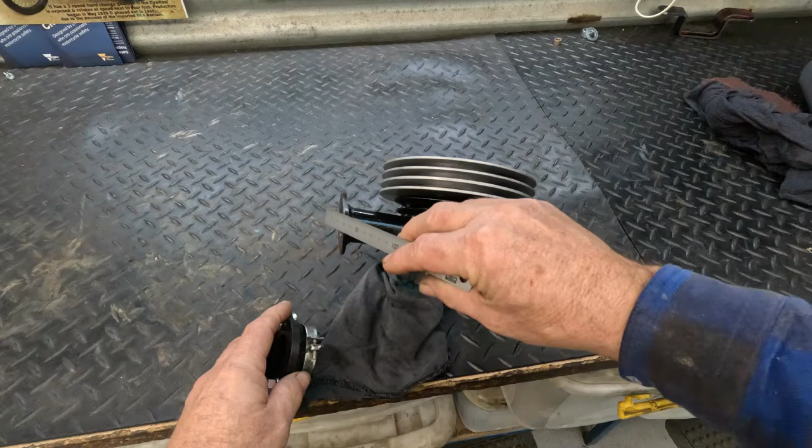You can see on the inlet manifold that this is flange mounted. What I'm going to do is change it to that fitting that fits on the carb, where you've got both sides. So I've got to make a little stub I'll weld on further down, because this flange side is too big to fit up in under here, and that's how much I've got to take off.

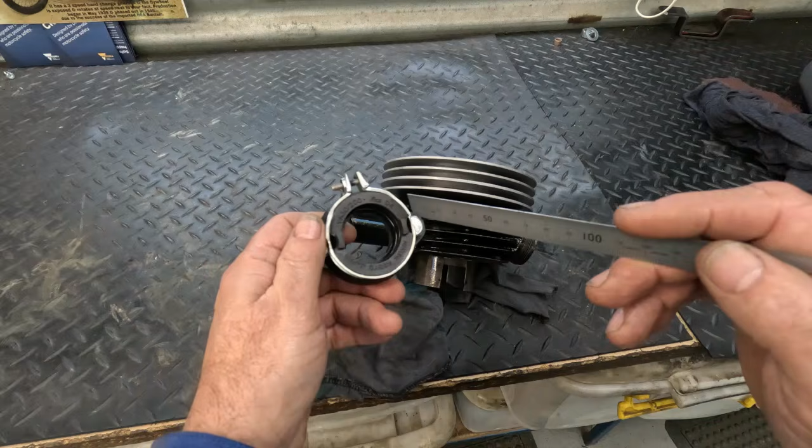First job is to go and machine up the new male stub that will fit in one of these mounts. Imagine one of these mounts without the flange, just back to back like that - that's what I've got coming. So I'll show you the drawing I've done to machine this bit up.

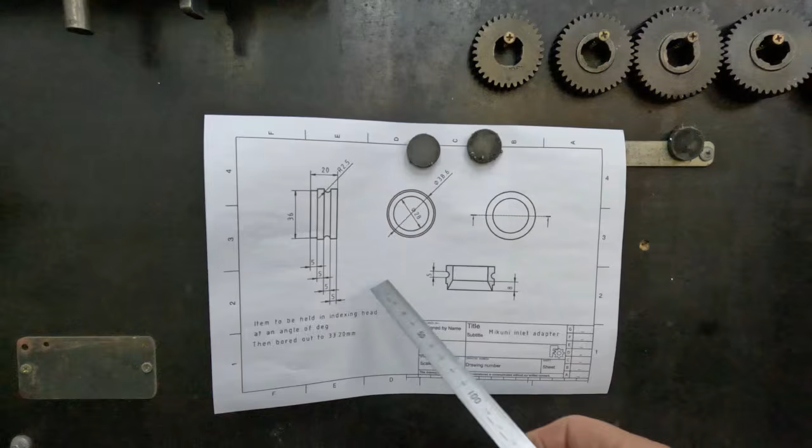So that's my drawing with all my dimensions, and this side will be welded onto the inlet stub on the actual barrel. So I'm changing from the flange mount to this stub mount.

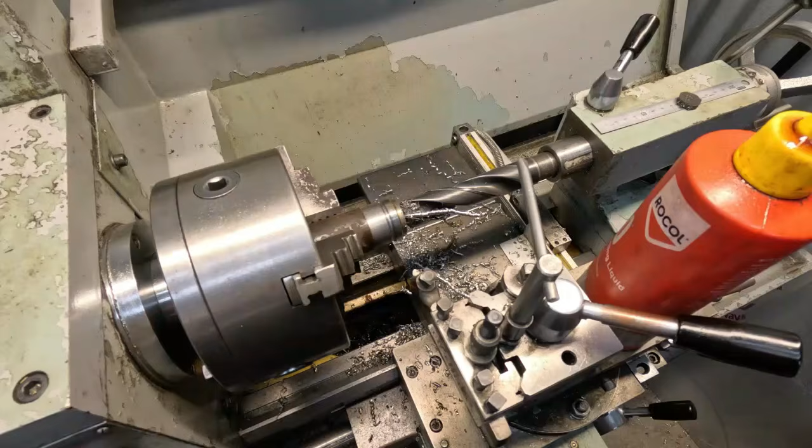I've got the outside diameter turned. I'm just going in, I've done a pilot drill, going in with a 25mm drill, and then I'll bore out to 28mm and part it off.

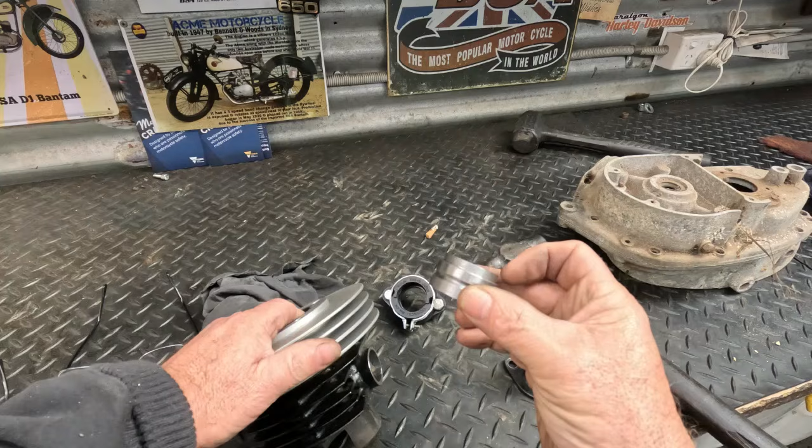So I've made my inlet section, and there it is. As you can see here, I've also cut the inlet tract off - that's how far I was out by calculation. That's a lot.

Next issue is I've got to attach that onto there, and I haven't got an awful lot of room to weld in here. So my current thinking is I will TIG weld it most of the way around and finish off with a bit of bronze.

I can't change this stub out because it'll take too much heat and potentially distort the barrel, which is not what I want because it's already bored and honed. If I was making a new one, I'd make a completely new stub and bronze that on, but I've got to do a retrofit. So I'll keep nutting this one out and see how we go.

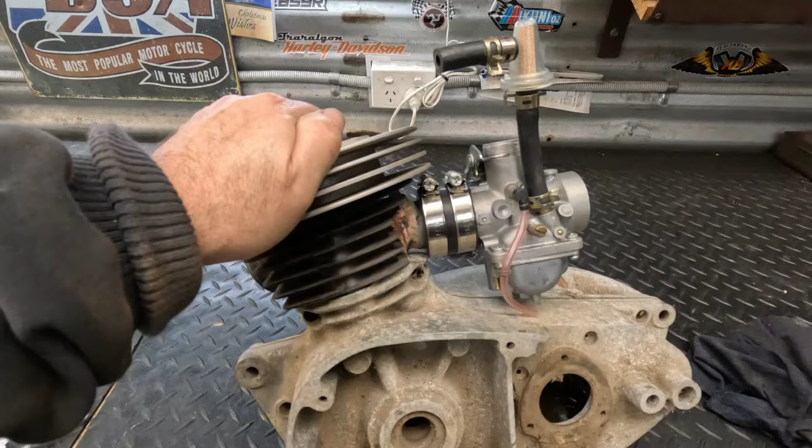So the inlet tract mods have been completed. The adapter that I made yesterday, I've just bronzed that on. Got clearance underneath the carby there. When the engine's sitting in its normal position, that carby's not too angled up - it's got a tolerance of about 7 degrees out of alignment it can cope with before you have to start playing with float levels. So yeah, pretty happy with that.

So we'll have to do a repaint on the fins, and what else have I got to do on the engine? I'm not quite sure, but I think this can go back together - the engine can go back together. So that may be next.

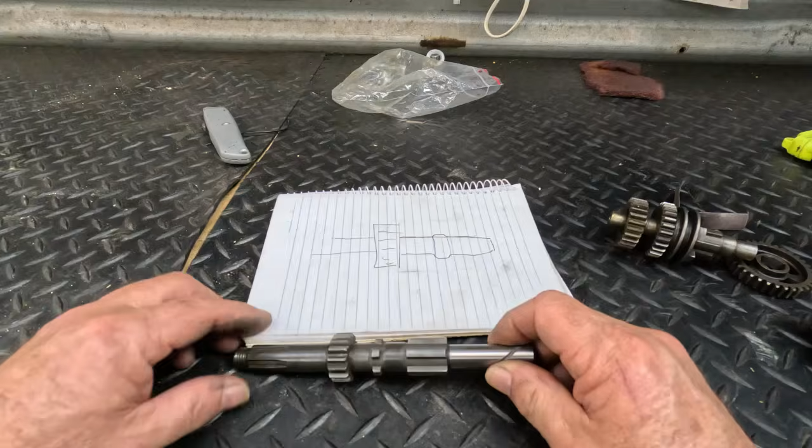So I just bumped the camera. Anyway, this is the main shaft, and I'm about to make up some bushes for the gear. This has got two separate bushes in here, drilled holes through for lubrication, goes on your main shaft. See, this one's really loose, and there's a fairly good reason for that.

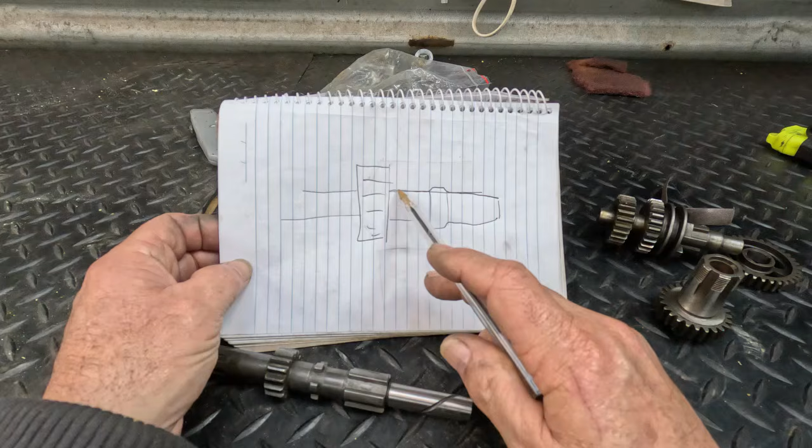If you've just done this quick drawing, when you find these Bantam main shafts, you will find that they are worn on this side, where the gap between the two bushes is it's not worn, and then it'll wear, and then it'll taper off right at the end.

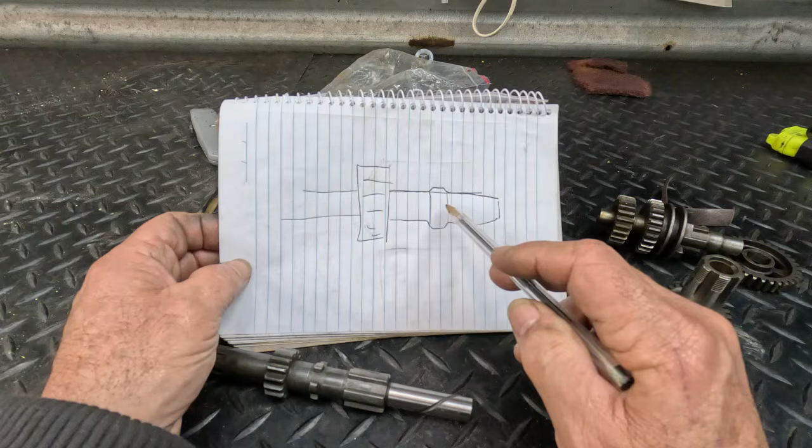So if you're ever going to change out your bushes, you really need to ensure that this is parallel all the way through. Otherwise, there's no point in reaming it, because you've got to get over this hump here, and it's usually a thou or two, and yes, that is enough. You'll find on bad ones the ends wear down by anything up to 10 thou or more.

I've had a friend who's got a cylindrical grinder, and I sent him off a heap of main shafts to just do a minimum grind to clean them up and get them all parallel again, and he's done a fantastic job. Thank you very much, Peter, because I know he watches.

Now this has to get reduced a fair bit, so I'm going to have to make some bespoke bushes, but it means I've got a nice parallel main shaft to work with. So I'll get over on the lathe, get some bronze, make up some bushes, press them in, and we'll get this done.

So I've just turned the outside diameter of these bushes, and I'm just drilling out the inside now.

Obviously that's just a pilot hole. Because we're getting a bit of depth, we just keep backing it out. So there's our bushes, our new bushes pushed in.

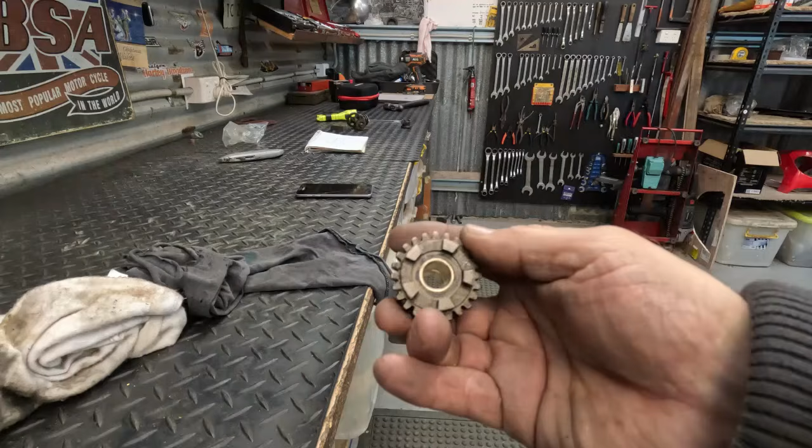And what I'm going to do now is just drill the oil holes in it. You can see an oil hole there, 90 degrees around, and there's another one, a tiny little 16th oil hole. We'll get those drilled in, and then we can go for reaming. Always drill your holes before you ream.

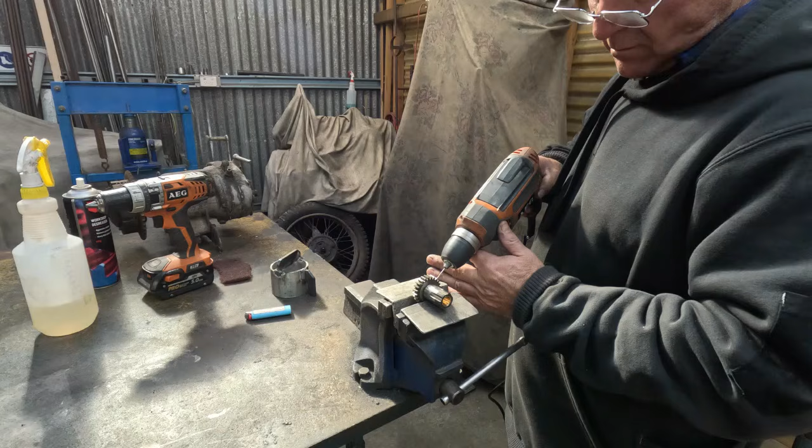Just go through again. The only problem with these tiny drill bits is that they can barely clamp up in the chuck, and the last thing I want to be doing is using a cordless, because they just simply don't spin fast enough. So that's our first hole done, and there's our second hole there.

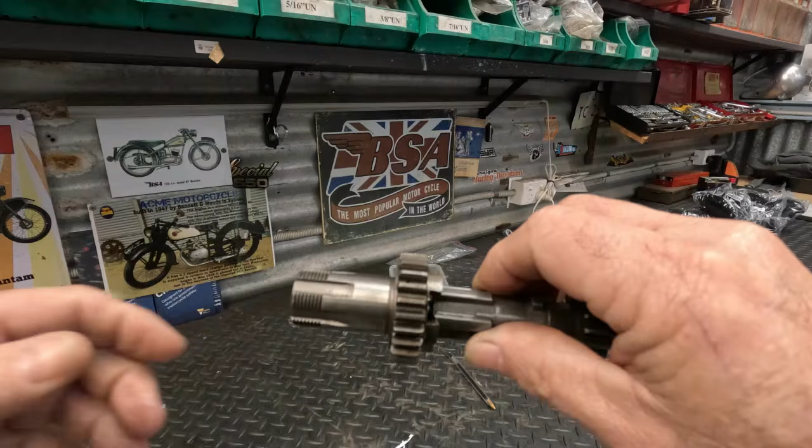So that's our main shaft done. That's got no rock in it whatsoever, and it obviously spins freely. And that's what you want.

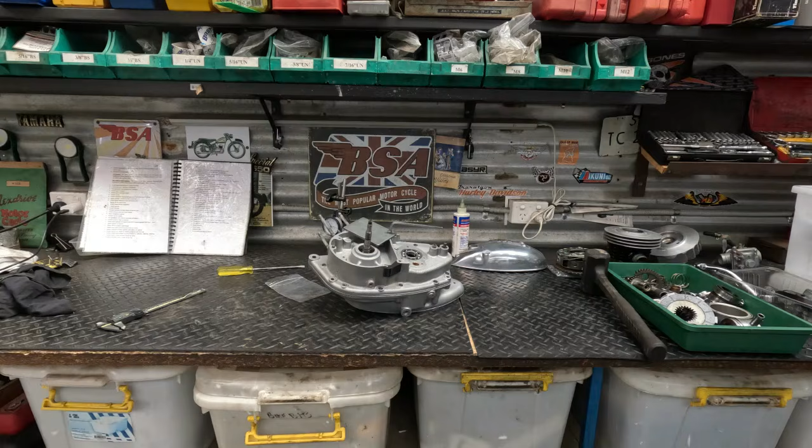So we move on to the next job. We've got everything prepped. And what I'm doing now, I'm just starting my rebuild of the engine. So I'll get all this together and get it back in the box.

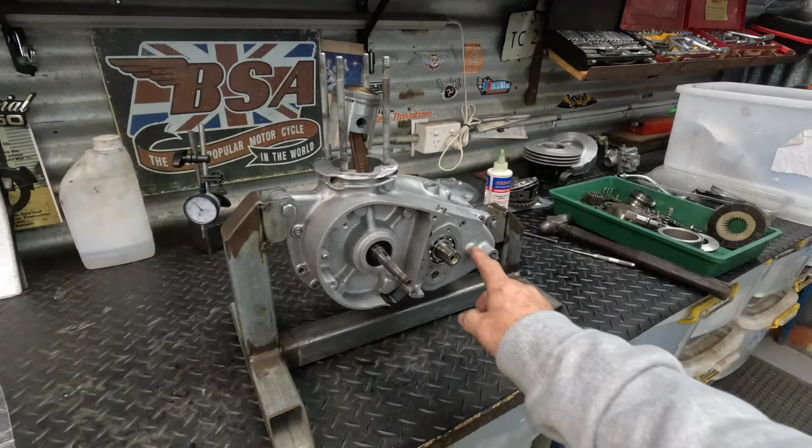Things are progressing well. I did have an issue, however, with this lay shaft bush. It was a fraction tight, end play wise like that. So I just scraped the shoulder surface on the inside, and that's spinning nicely now. I actually measure the end float, so I'll just tap that in, measure it, tap it back the other way, measure it. So I've got four thou, 0.1 of a mil end float in the shaft.

So all the cases are obviously back together and torqued up, and now we're getting ready to put barrel and head on.

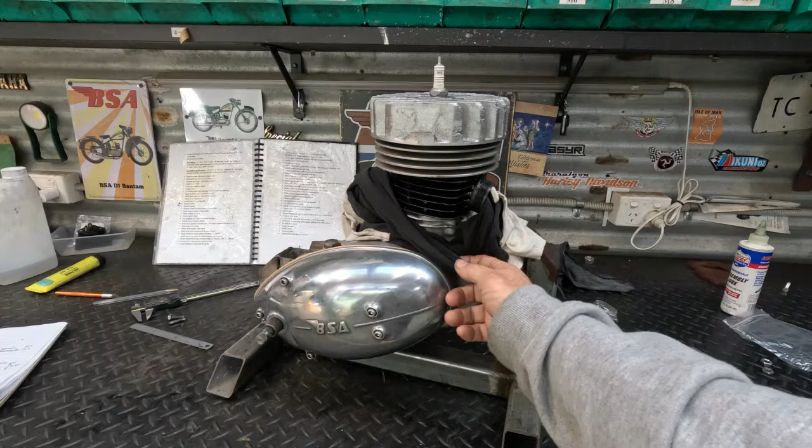It's getting there slowly. I've just got the inlet and the exhaust plugged up with a rag, just pop that in there. What have I got to do now? Put some oil in it. That's it. So we'll get that done, and then we'll be nearly ready to fit up.

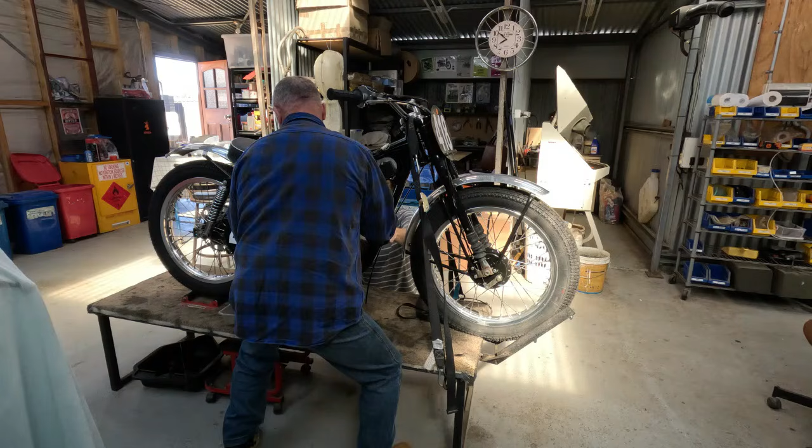So as you just saw, engine's in. I'll just go through bolting all the engine up, hooking up all the umbilicals, clutch cable, carby, electronics, all that sort of stuff.

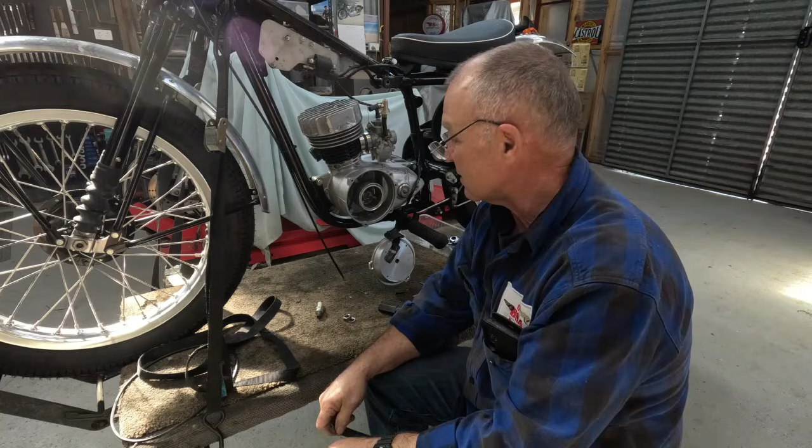So I've got the pipe, kickstarter, gear change lever back on. Time to get the tank on, the chain on.

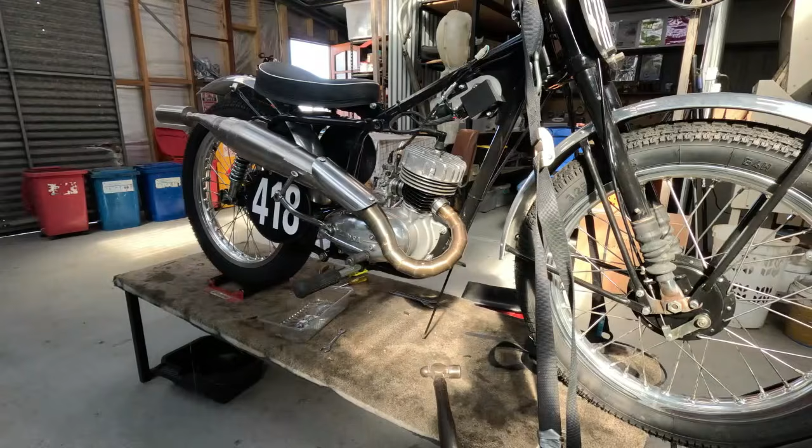Rightio. Thought I was missing one there for a sec, but I'm not.

Might pump the tyres up.

Okay, I'm going for a roll start first because it's a fresh rebuild and sometimes I can be a little bit ticky touch, so we'll get some fuel on and see how we go.

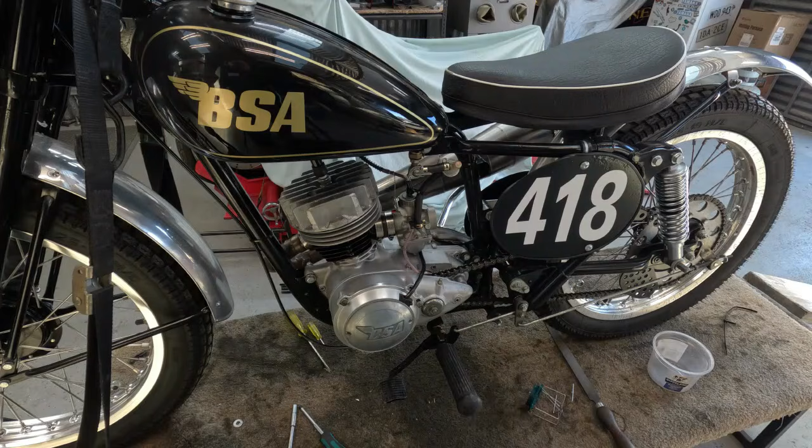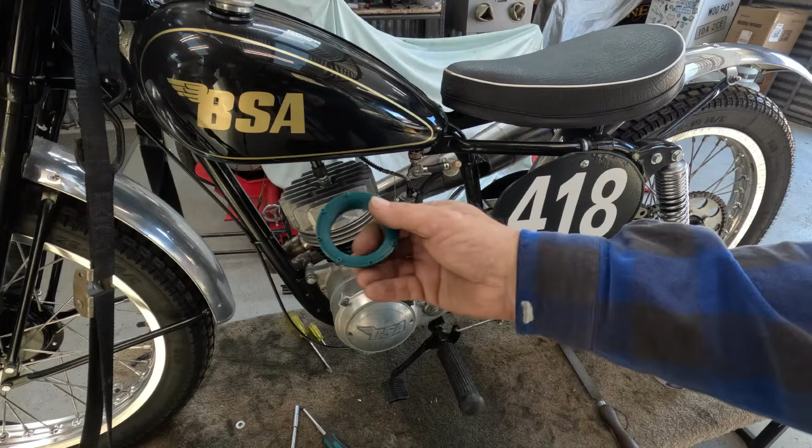So I've just changed out my pilot jet down there. I'm not entirely happy with this, so I'm going to change the design a bit. I'm on the right track, but this isn't going to do the job that I want. But I'll show you the next Mark II version when I get around to designing one on CAD and 3D printing it again. In the meantime, I've changed the pilot jet and I'm going to go for a start.

There's the bike behind me. Progress thus far is really, really good. I'm still kicking myself, I've got it so wrong with my inlet tract length and all that sort of stuff. But you know, that happens. All my fault, I'll own up to it.